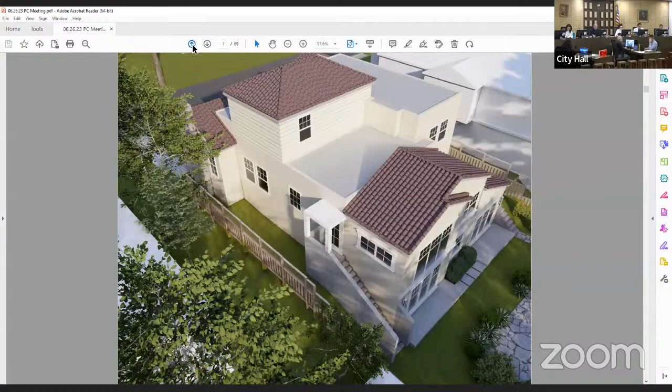Planning Commission reviewed this as a design review study item on May 22nd this year. The applicant submitted a response letter and revised plans, date stamped June 13th, 2023, to address the Planning Commission's comments and suggestions. The applicant's response letter is included with the staff report. In summary, the applicant is requesting design review for a first and second story addition to an existing single-unit dwelling. The applicant is in attendance on Zoom if there are any questions, but someone is available for questions of staff.

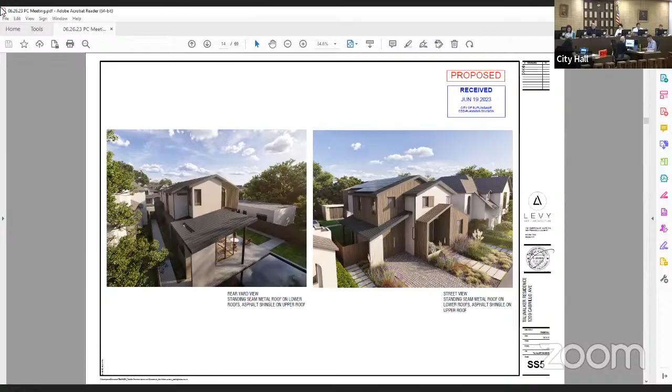Are there any questions? My only question is, was this something that they came forward with for the changes? Yes.

Okay, then I'm going to open the public hearing. Would the applicant please come forward and state your name? Anything else you'd like to add about your project? Good evening, Commissioners. My name is Ross Levy. I'm the project architect.

These are, I think, fairly nominal changes. We aren't changing the footprint or the disposition of the building in any way. They're material changes only. The first change is that we've altered some of the siding materials, nothing visible from the street view, but we had quite a lot of wooden siding, and this has been determined to be a maintenance issue over the long run. We're proposing some substitution of stucco, the same stucco we've already proposed for some of this wood siding.

Secondly, we've had some issues. We were proposing an integrated solar panel roofing material, and we've had some trouble actually acquiring that material and finding licensed installers to install it. So we're now proposing a combination standing seam metal roof and composition shingle roof. The composition shingles will be largely covered by a traditional solar panel array. That's the upper roof of the house, basically invisible from the street, but we provide you a rendering at a higher eye level so you can see that. And finally, we've relocated the kitchen within the plan of the existing footprint of the plan.

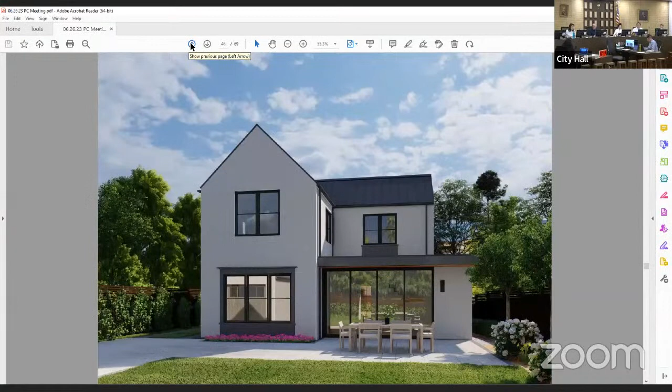This application is for design review for a new 2-story single unit dwelling and detached garage. The proposed project is an interior lot with an existing 2-story house with an attached garage. The applicant is proposing to demolish all structures on site and build a new 2-story house with a detached 1-car garage. The total floor area would be 3,246 square feet, where 3,265 square feet is the maximum allowed. The new dwelling would contain 4 bedrooms. At least 2 parking spaces are required, one of which must be covered. The proposed detached garage provides 1 covered space, and 1 uncovered space is provided in the driveway.

All other zoning code requirements have been met. 1 existing landscape tree will be removed and 6 new 24-inch box landscape trees are proposed to be planted on site. That concludes my summary. If there are any questions of staff, I'm available at this time. Are there any questions of staff?

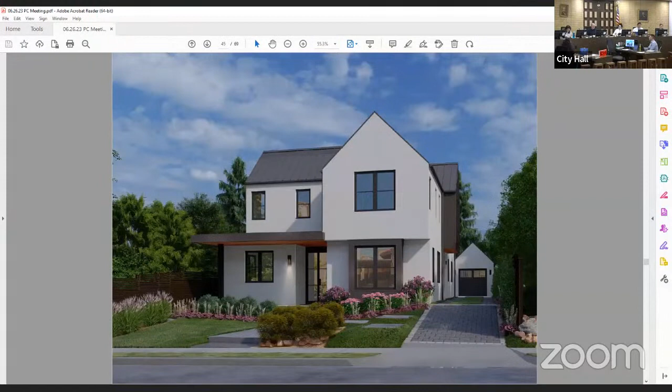Good evening. My name is Yossi Zinger. I'm with TLG Architects. Thank you for having us here this evening for a study session. We're here to propose a new 2-story residence with a detached garage. It's in the modern Tudor style, distinguished by crisp gable shapes, modern detailing, standing seam metal roof, with

some contrasting wood elements and accents, bay windows, steel and glass entry doors, and the stained wood ceiling on that porch.

We have gone through the neighborhood and we think that we've designed the house to be compatible with both the adjacent houses and the neighborhood as a whole. We have broken down the massing by setting back the second floor a little bit so that the front gable is narrow and vertical as is appropriate for the style, with a broad porch, flat roof porch on the left, and like I said, a steel and glass door. And I have with me the landscape architect, Michael Callan, to talk about planting, things like that.

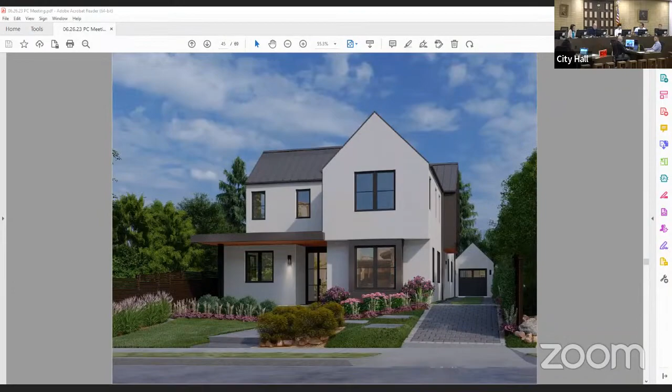Yeah, I mean, I like the house. The simplicity has a point of view, which I think is good. I don't disagree though with my commissioners, so I don't know what you'll do with that.

I do think the roof plan is one of the slickest roof plans I've seen in a while. It's just really clean, and the space for the solar panels works really well.

The overhangs, or the lack of overhangs on the roof, add to that flatness. I also don't know what the thought is on just rain coming down the sides of the house and not shedding with an overhang. And then my pet peeve is three-foot wide porches — they're not very useful. If that porch could be five feet deep, it would be a lot more useful for actually putting a chair on.

Yeah, I'm generally a fan of the house as well. I didn't notice that about how the roof hides the solar panels — that is really clever when I look at it that way.

Generally, I do like it, and I like what they're going for, but except for that protruding gable end and second story — I was lacking the words for it earlier — it looks larger than it is because of all the extra white space, and then there's this small double hung window in the middle, so it looks even larger than it actually is for how much it takes up of the front facade. Other commissioners have already discussed ways to adjust that, and I agree with those.

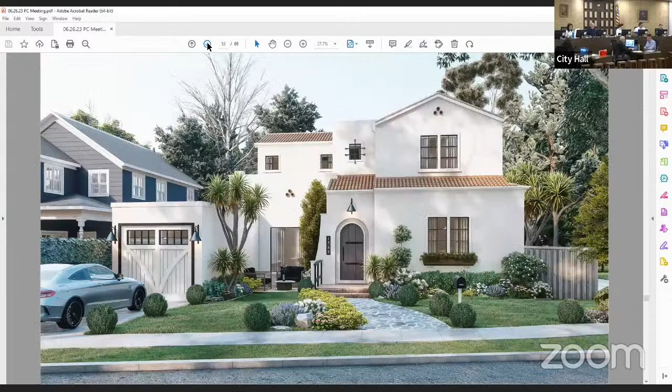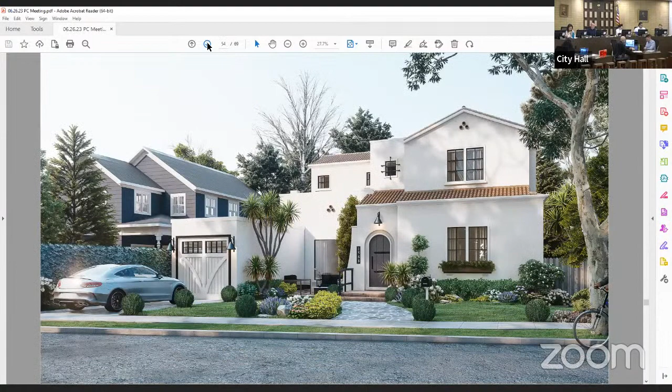Can we hear the staff report, please? This application is for design review for a first and second story addition to an existing single unit dwelling. The proposed project is an interior lot with an existing one-story house with an attached one-car garage. The applicant is proposing a first floor addition at the rear of the house and a new 935 square foot second story at the front of the house. The total floor area would increase from 1,277 square feet to 2,725 square feet, where 2,736 square feet is the maximum allowed.

The number of bedrooms would increase from 2 to 4, and at least 2 parking spaces are required, one of which must be covered. The existing attached garage provides 1 covered space, and 1 uncovered space is provided in the driveway. All other zoning code requirements have been met. All existing trees are proposed to remain, and no new landscape trees are proposed. That concludes my summary. Any questions of staff?